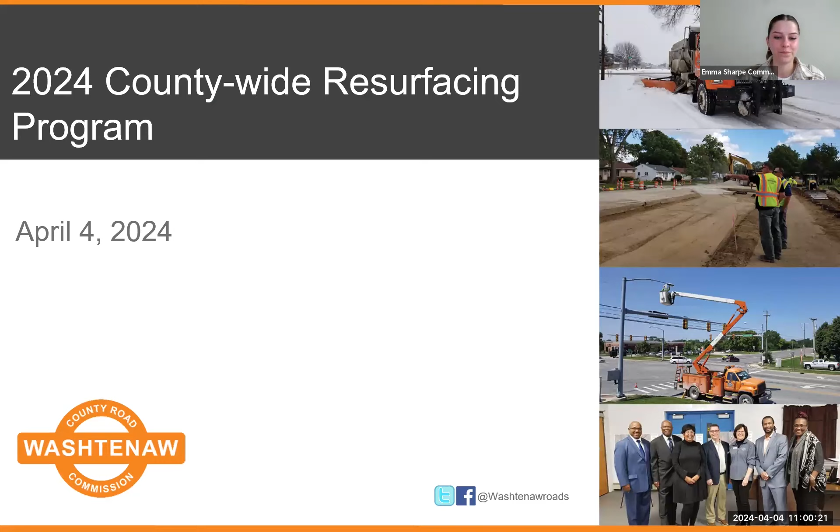Hello, and thank you for joining the Washtenaw County Road Commission's virtual construction information meeting regarding the 2024 countywide resurfacing program. My name is Emma Sharpe, and I'm a communications associate here at the Washtenaw County Road Commission. This morning, I'm going to go over some housekeeping items before turning it over to staff for a presentation about the projects, and then we will open up the meeting for your questions.

Joining me in this virtual meeting is Project Manager of Design and Construction, Mike Bernbeck, as well as Senior Project Manager of Design and Construction, Nate Murphy.

So we have two types of resurfacing, and we have 4 jobs this year that fall in the category of pulverizing and resurfacing. The method that we use is to bring in a large pulverizer that will chew up the existing road surface, getting into a little bit of the gravel base to mix it up so we have a fresh aggregate surface to pave on.

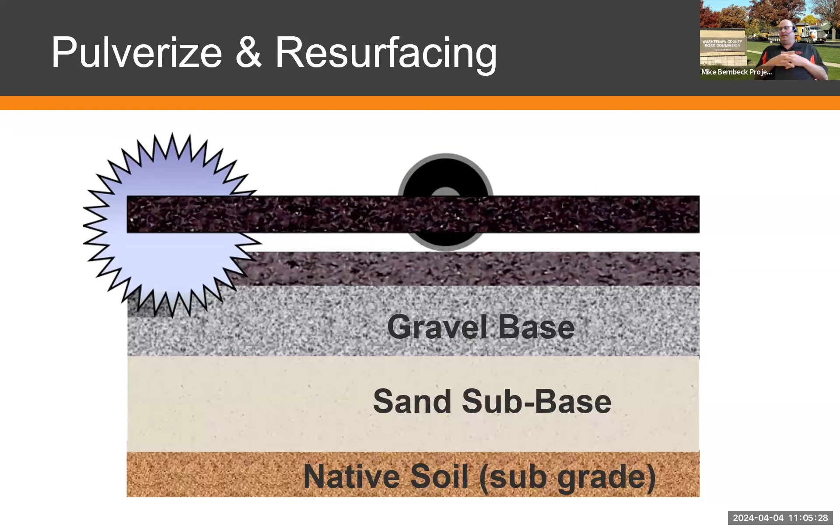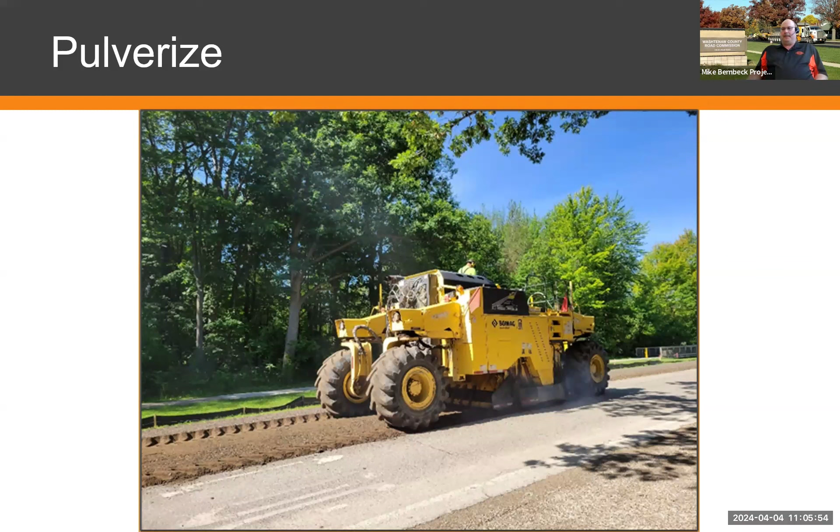Here's the picture of a pulverizer. It's not the one that is coming to us, but it's the same theory. You can see how we grind up the existing pavement. It comes out the back as aggregate, a surface that we'll be grading and compacting and watering, so we'll keep the dust down.

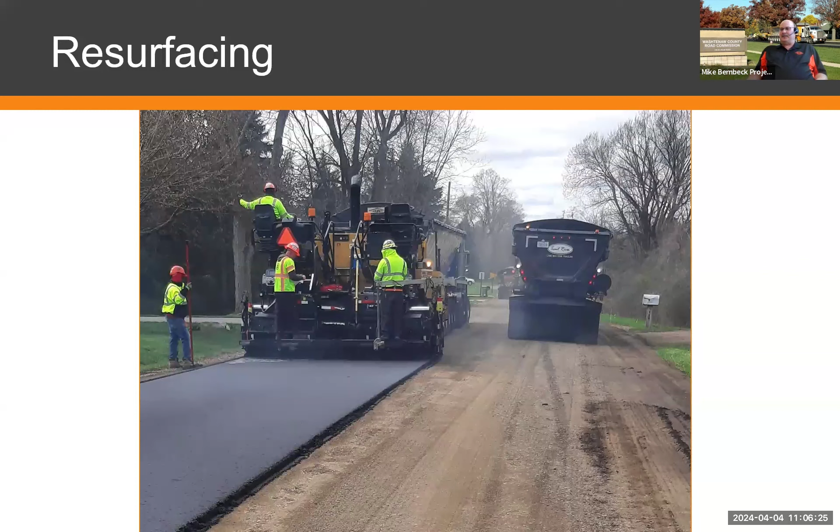And then we move into the resurfacing portion of the job. And this is the asphalt paver. In a new road, we have two lifts. One is a 2-inch base, and then we have a 2-inch top course to put on, and that creates the new road that the traveling public will use.

Now we'll discuss the pulverizing projects that we have taking place. The first project is Parker. I'm just reading some notes, I apologize. This is a millage job, and we have some MTF money involved in it as well. The sticker price is $471,000. And the road is closed with a detour, which we'll show you in a moment. And like I say, we're looking for about a 2.5 week closure on this.

The detour for Parker Road: people wanting to go north will be coming up Parker to east on Scio Church Road, north on Zeeb. And then if you need to go back to the west, you'll go down Jackson Road to Parker, and you can come in from the north there.

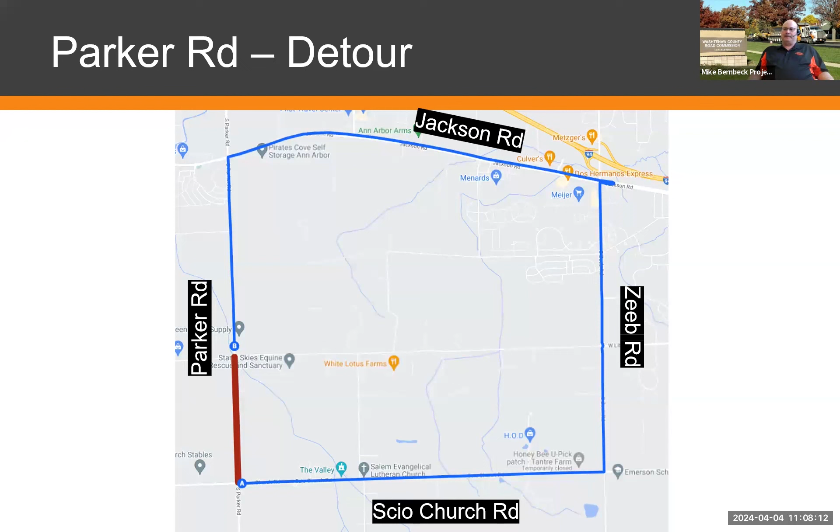Our next one is Hogback Road. We will be pulverizing and resurfacing and milling Hogback Road between Washtenaw and Clark Road, Pittsfield Township. This project is funded through the Michigan Transportation Fund and 2021-24 millage dollars with a cost of $359,000.

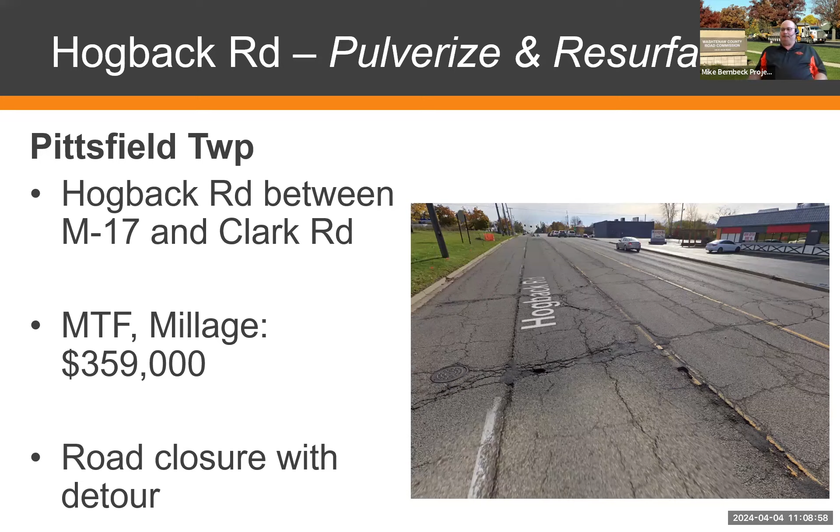This project will require the road to be closed and a detour will be provided. This is going to be about a 2-week job as well. We always have to throw in the weather factor. Here, the detour route for Hogback Road. Residents can take Clark Road to Golfside and Washtenaw Avenue.

We will have a hard closure at Washtenaw, which means we will have barricades strung across all 5 lanes. So we will have an opening at Clark Road for you to come in, and that will help us deal with the traffic that we will be affecting through this job. So if you need to come in, you need to come in from the north end.

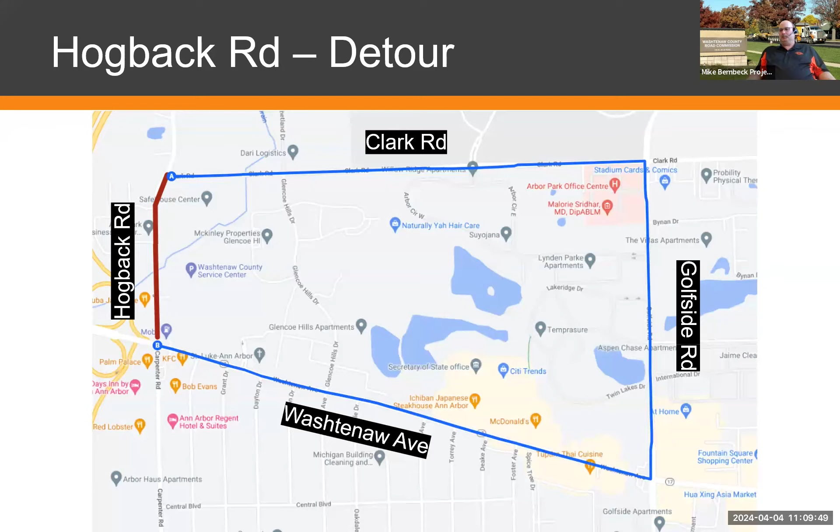The next one will be Dixboro. The next pulverization is Dixboro Road. Hogback, Dixboro, and then 7 Mile, those all will start after school lets out. We try not to cause undue concerns for students to get to school.

So we'll be pulverizing and resurfacing Dixboro Road between Plymouth and M14 in the townships of Ann Arbor and Superior. This project is funded again through the Michigan Transportation Fund and our current millage program with a price tag of $511,000. This project will be about 2.5 weeks, weather permitting. And once again, it's a hard closed road, so we do have a detour route to show you.

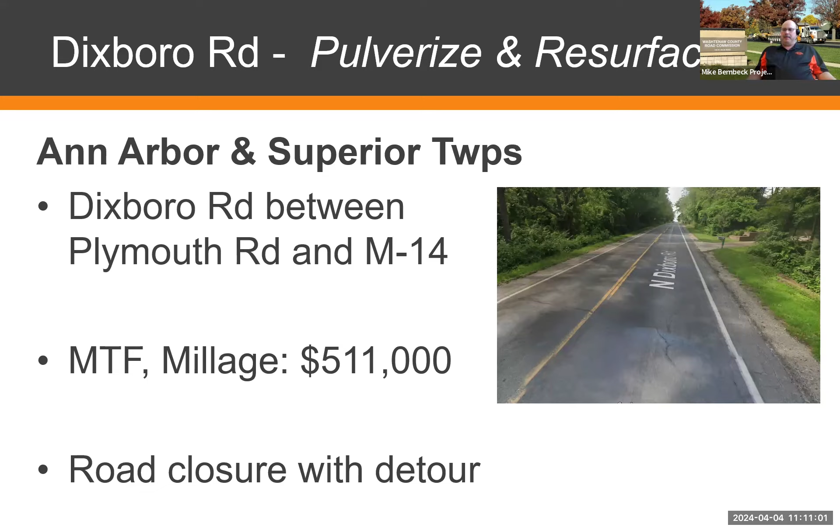This one's kind of lengthy, but it's necessary. We set our detour routes up on hard surface roads, and that takes care of concerns of dust and safety on the gravel roads. So please keep that in mind, that our detour routes take that into effect. So some can be long for that reason.

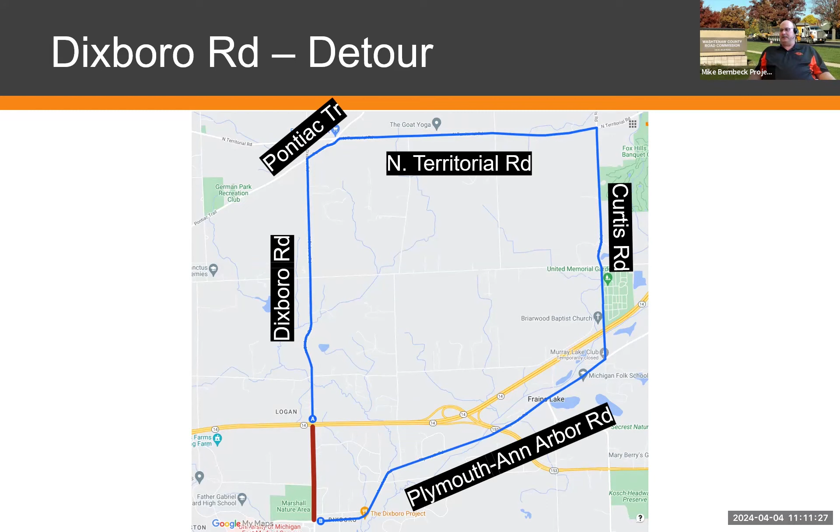And lastly, we have 7 Mile Road between Pontiac Trail and Angle Road in Salem Township. This project again is funded through the Michigan Transportation Fund and the millage, costing $568,000. And once again, it's the whole crushing of the existing surface, grading and paving. The project requires a closure and detour route.

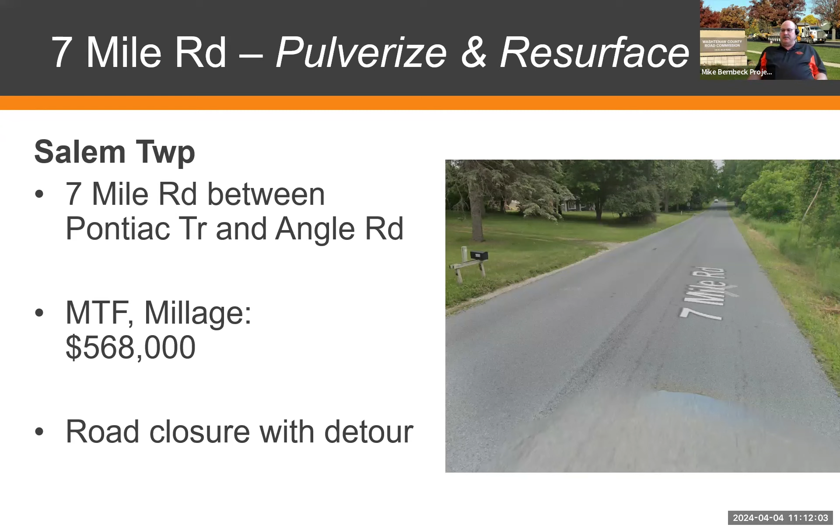Which you can see is Pontiac Trail, 6 Mile over to Angle, and Angle back up to the 7 Mile and Angle intersection.

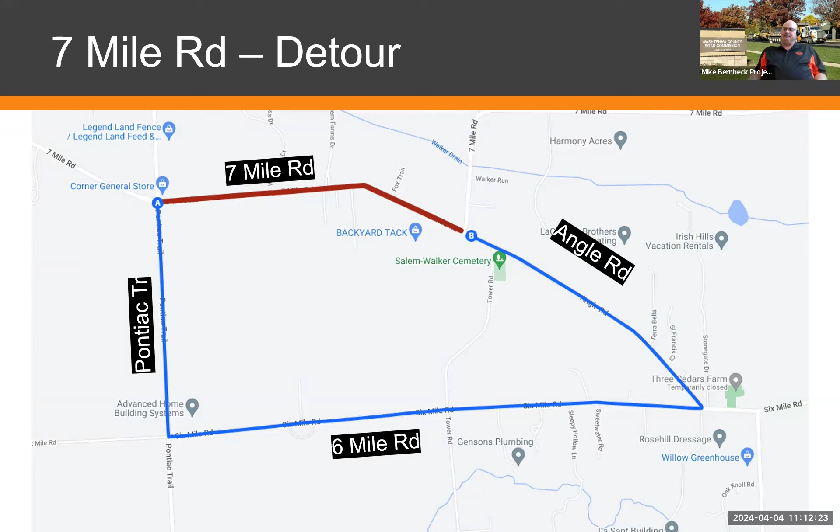During these road closures, access will be maintained for any residents who live or work specifically within the closure, or any businesses that are on the road. Your customers can make it to you. There are times during the resurfacing projects where equipment may be blocking your personal driveway. If you need to coordinate access to your personal driveway during paving operations, please reach out to me or get the attention of our crews so we are able to accommodate you.

A lot of times we're just asking you for a couple minutes so that we can move equipment around and make the area easily accessible for you to get out or get into your residence.

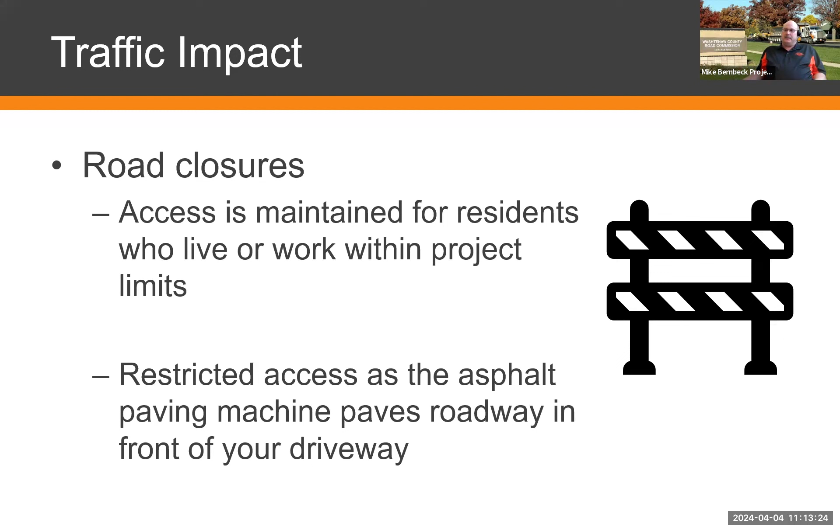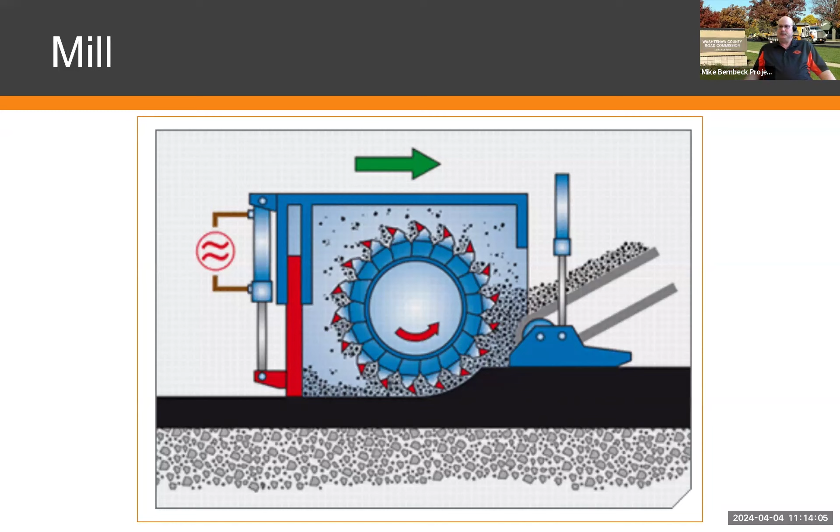Now we'll discuss the mill and resurfacing projects that we have taking place in 24. The milling is, we take upwards of 2 inches of asphalt off the existing road surface, and it's like a planing of the road, and then we go ahead and place a fresh new 2 inches of asphalt for the road surface. This type of resurfacing is performed on roads in pretty good condition, meaning the base is stable and does not need to be redone just yet.

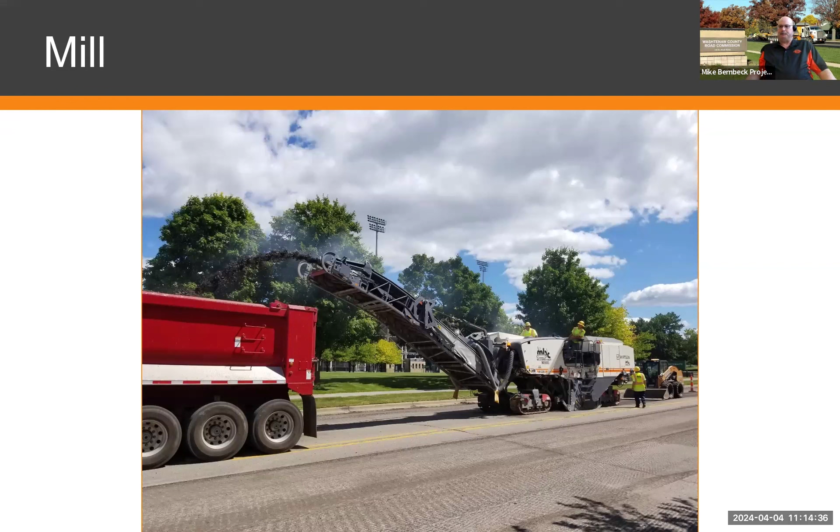This is the operation. You can see in the forefront the lanes that have been milled. That's the surface next to the existing surface where the machine's working right now. Then there's the milled surface, and now we're placing the new asphalt on, which, like I said, is 2 inches of fresh material.

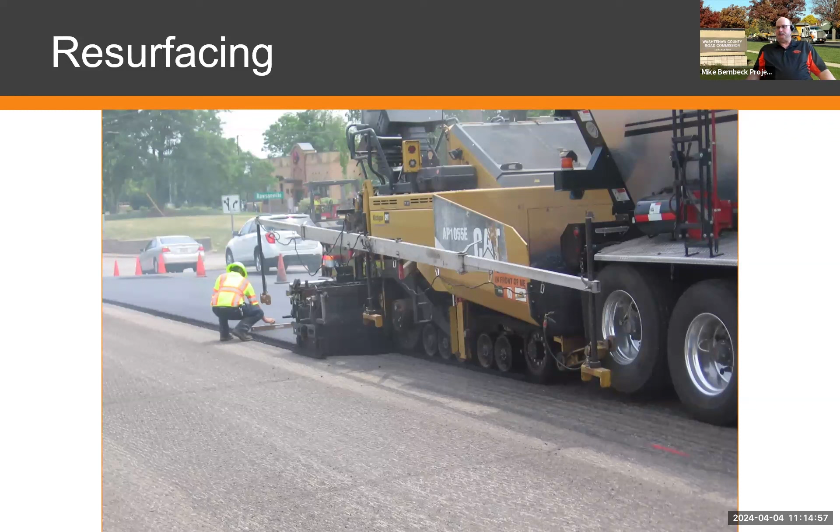The next road we have is Sharon Hollow Road in Manchester and Sharon Township. And as I said, we're working on scheduling of these jobs with our contractor on availability of equipment and so forth. So that's where our scheduling sometimes goes haywire. We'll discuss how you can keep up with us in a later slide here.

This project is a mill and fill and roughly $439,000. We'll have daily lane restrictions with the use of the flagging operation and traffic control people. And we just ask for your cooperation with those working those hard spots on our jobs.

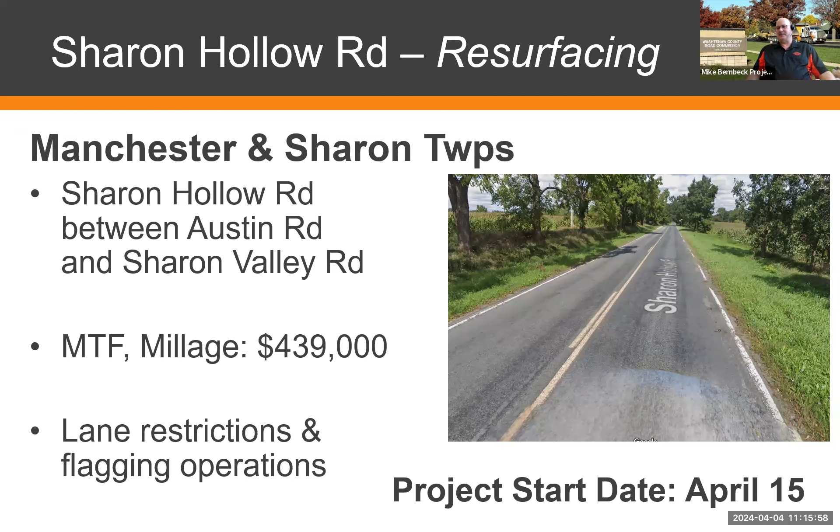We have Schneider Road, Bridgewater and Freedom Township, and that has the Michigan Transportation Funds as well as millage at a cost of $782,000. You can see the prices change a little bit. Some jobs are a mile long, some can be upwards of two miles long, thus the change in price. But that's how it's set up.

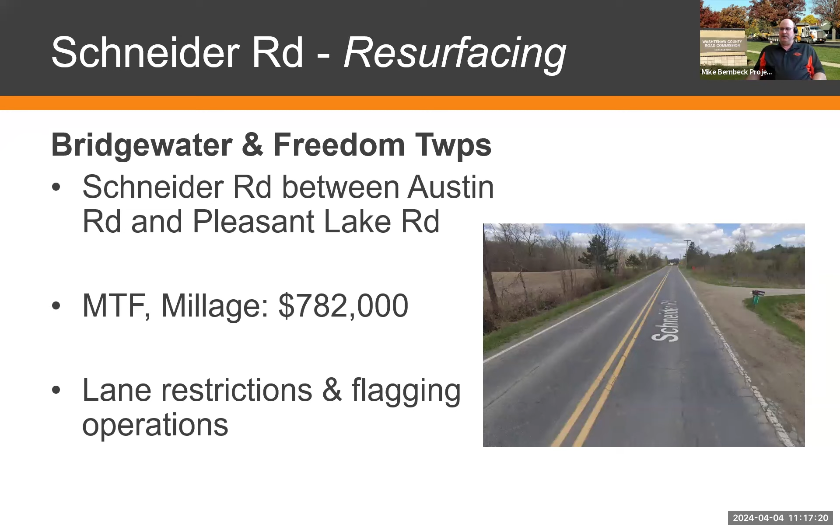So we also have Platte Road. That's a resurfacing, and if you look in the millage funding, it was scheduled for between Textile and Ellsworth Road. Over the past few years, we've had updates to a lot of the southern piece north of Textile. So we're going to catch up to where that work has been done. We're going to take it up to and through the Ellsworth intersection. We have Michigan Transportation Funds as well as the millage money for $658,000. This will be done with a lane restriction operation.

Our next one is Scio Church Road between Zeeb and Wagner. The one thing with that job is, the road's set up to do the intersection, but when we get down to the Zeeb Road area, we're going to stop short because we have a roundabout in the schedule for next year. So we're going to enter into that area a little bit, but we don't want to put good funds in this year that would just be torn up next year.

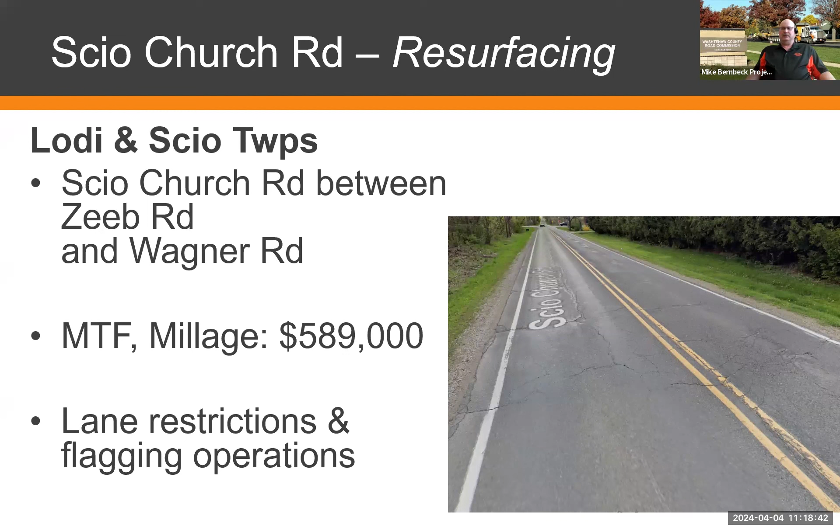Once again, this is funding from the Michigan Transportation and federal money. Well, it's a millage job, excuse me. Oh, I'm looking at a different slide. I'm sorry. So for Scio Church, we'll be working from Wagner to just short of Zeeb. We'll go from there. Am I on Miller Road, Emma? Nope, right now you're on North Territorial Road. Oh, okay, here we go. Sorry, I got ahead of myself.

North Territorial Road is a mill and fill that is from the east side of Webster Church Road through the Hellner Road intersection, and also a little piece of North Territorial between Whitmore Lake and the gas station east of Whitmore Lake Road. This is an overlay project, and it has Michigan Transportation Funds and additional federal money. And the price tag is $831,000. We're going to have a lane restriction and flagging operation for that project.

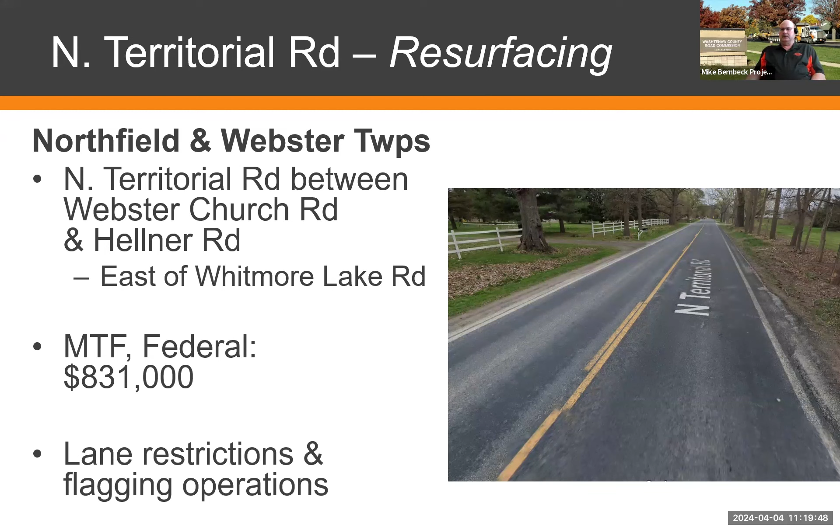So then we have, I've spoken about Platte Road. I'm sorry, I got ahead of myself. So we're down to Miller Road. We're going to be doing Miller from east of Wagner to the M14 or the city line. It is a mill and fill with a price tag with Michigan Transportation Funds and federal aid money of $239,000. This is again a mill and fill, which is a lane restricted operation with flaggers involved. So just need to keep the people within the operation safe, if you would, please.

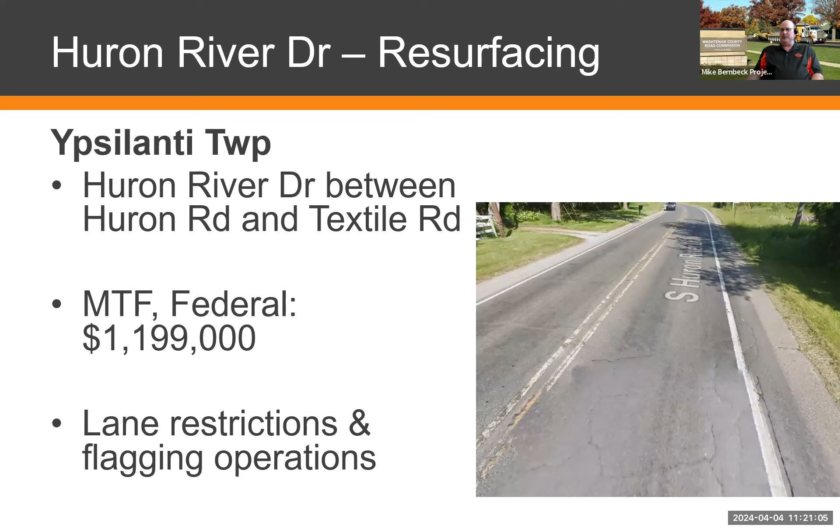Huron River Drive. This is in Ypsi Township, where we're going on Huron River Drive from Huron Road to Textile Road. This is Michigan Transportation Fund and federal aid money, a price tag of $1.2 million. This is a mill and fill project as well, with lane restrictions as we're working through them.

Traffic impact. During construction, our mill and resurfacing jobs will be performing under lane restrictions and flagging operations. Access will be maintained for residents who live or work within the project limits. However, please just be aware that there may be times where equipment for resurfacing may be blocking your driveway or the entrance into a subdivision. As I stated before, please reach out to me or the road workers on site to coordinate any important accommodations you may require, such as a doctor's appointment, and we'll make sure we help you through that.

As the project manager, I also ask that you pay special attention to our flaggers, as they are the eyes and ears of our work zone and help keep both the workers and motorists safe throughout the construction zone. So please follow their traffic directions and drive with caution through the work zone.

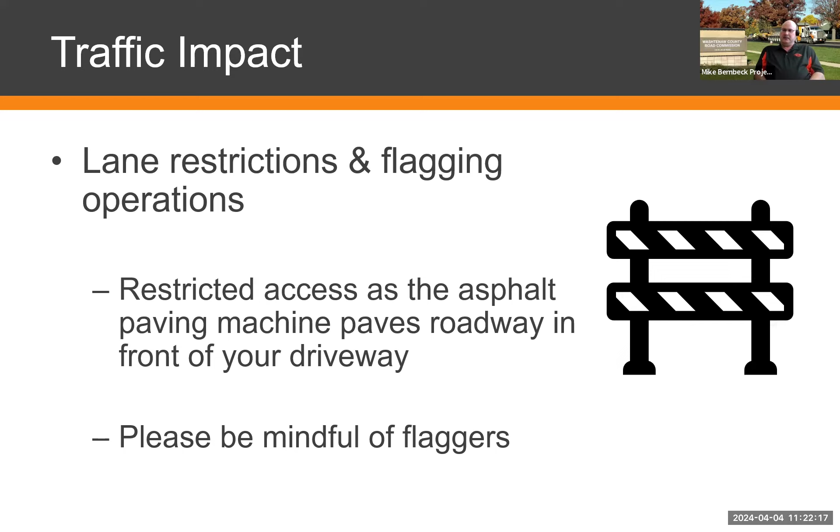At the end of the day, we would like everyone to make it home safely, commuters, residents, and workers alike. Please remember that work zones are the offices of our road workers. You should drive through the work zone like it was your brother or uncle out there performing the construction. So take it slowly and be ready for sudden stops.

Here's my contact information. Please feel free to reach out to me with any questions or concerns that you may have regarding the resurfacing program. And I will now turn it back over to Emma. Awesome. Okay.

So now I'm going to take just a second and show you how to find more information on our website. I've just opened a regular internet browser, gone to Google, and typed in our web address, which is WCRoads.org. Once you get to our homepage, you'll see this top bar. It's like a menu bar, and you can hover your mouse over the roadwork and construction tab. If you click on current projects, you'll be taken to our current projects webpage.

Here you'll be able to see an interactive map of all the projects that we have taking place throughout the county. You can zoom in or just click on an individual project and find more information that way. Or you can scroll down and find individual project tiles for each project that we have taking place. So for example, I'll go into the 7 Mile Road Resurfacing project.

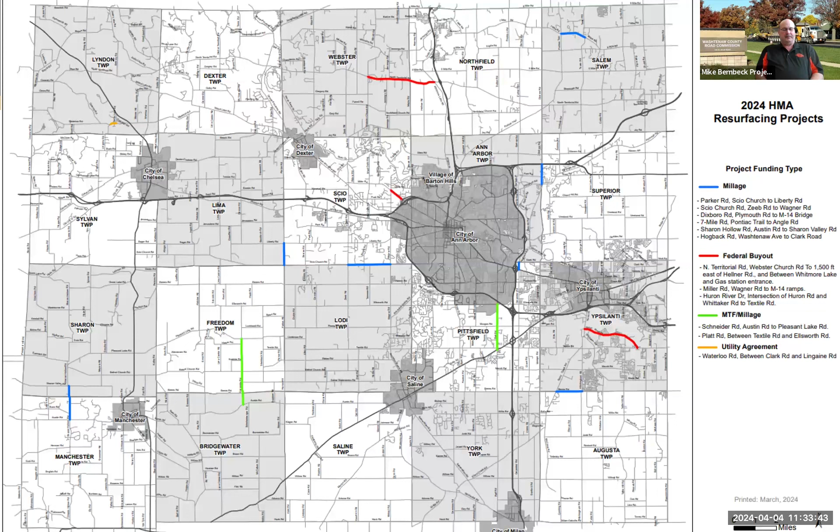Yeah, well, those are their own separate contracts through the engineering department. And this job is through the engineering department, but it's strictly using the roads that were on the millage that was voted in by the public. So yes, there's just different funding sources and different projects altogether.

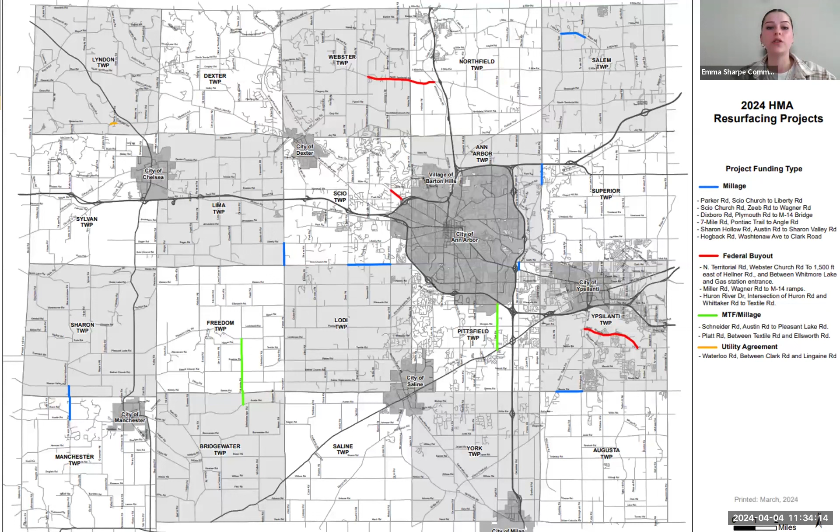So if I'm understanding this correctly, Mike, this is all preventative maintenance that was decided years ago, and the projects that you're speaking of, Brenda, we've actually already held virtual public information meetings on both of those projects. You can go on our website, click on the project pages for both projects, and watch all the recorded videos that we've posted on the project page.

People asked me about it, and I just wanted to bring that up here because it's two projects pretty close together, and I'm glad they're being done. Don't get me wrong. And Wiard Road was on the 2024 road millage project, in Ypsilanti Township from I-94 to US 12, I think it was. And I can't find that anywhere on the website, on any of the material. I was just wondering.

Well, Brenda, I can talk to you later about all of our projects in your area, but Wiard Road is actually a chip seal project. And that would be on our overall 2024 project map. I know we're overdue for a meeting with your township, but I can definitely touch base with you and update you on all the projects within your area.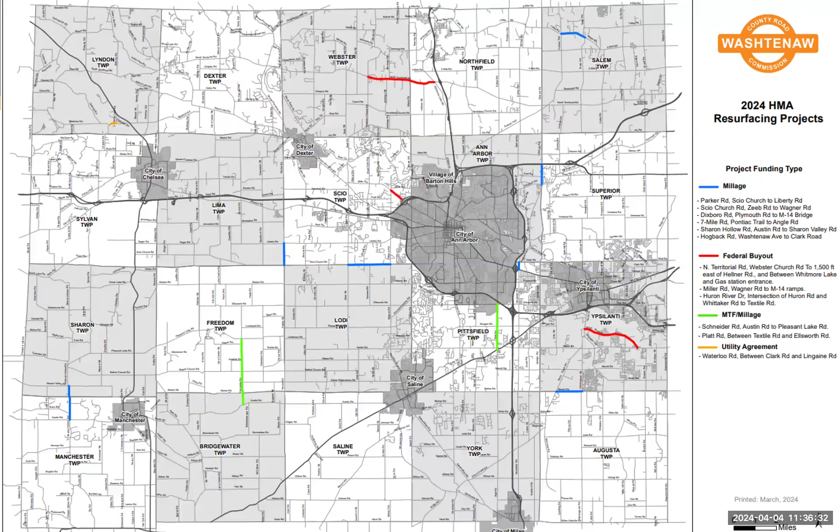So if you go on our website, go to our project map, and there's a category called seal coat, and under that is all of our seal coat projects, and Wired's listed under that. Yeah, I found it. Great.

Adam, I see you have your hand raised, so I'll ask you to unmute yourself. Hello. Yeah, I pulled up the website. If you go to our current projects, Wired Road does come up as a chip seal, just to help. And that's performed by the operations department, Brenda. I think it needs more than chip seal, but that's all my comment is. Okay, thank you.